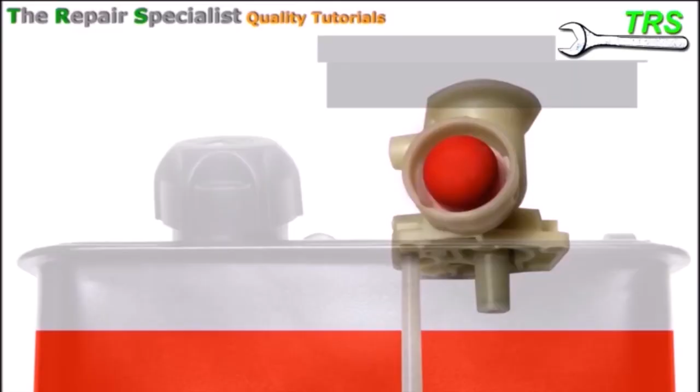What do I mean exactly by flooding? Well, it's an excess amount of fuel getting into the engine, and this generally prevents the engine from starting or running.

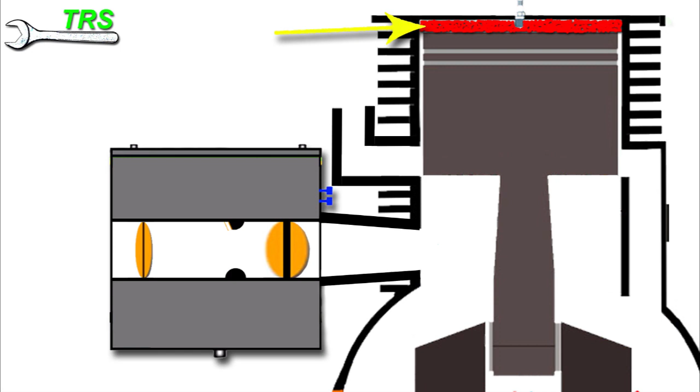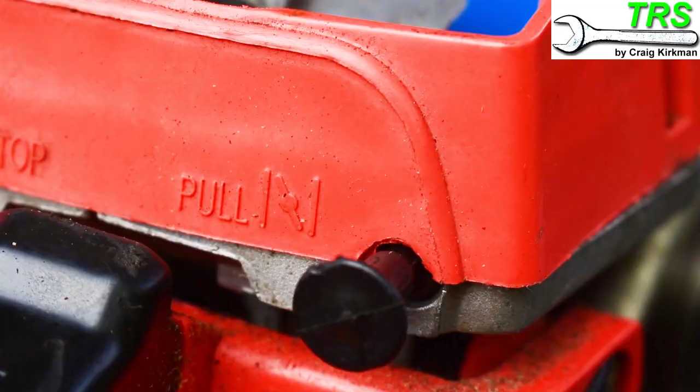There can be many reasons for flooding, but one of the most common is when the choke is left in the on position too long. Sometimes this happens unknowingly due to a mechanical disconnect between the choke lever and the actual choke butterfly or choke plate, so no matter what position the lever is in, the choke stays on.

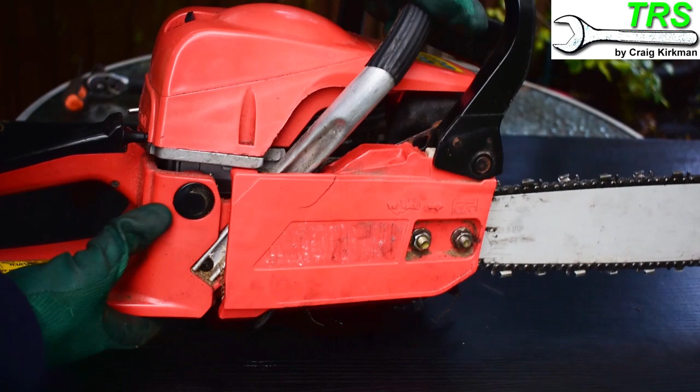Or sometimes the operator has unwittingly left it on too long, such as when the chainsaw is already warm after running for a while and being turned off. A few minutes later, when trying to start it again, the operator puts the choke on, but this only floods the engine because it's already warm and doesn't need the excess fuel.

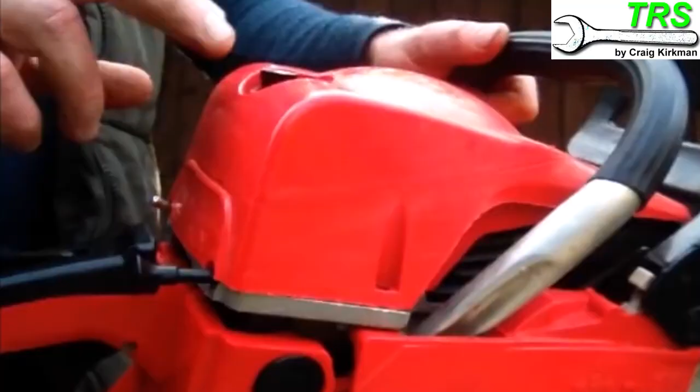Another cause of flooding is when the operator mistakenly leaves the on-off switch in the off position and tries to start the machine, pulling the starter cord repeatedly until too much fuel goes into the engine. Of course it would never start because it's in the off position, and it just fills the engine full of fuel.

One less common reason for flooding is a problem inside the carburetor where it's not regulating the fuel properly. As I've said, these are just a few of the most common causes I've come across.

To begin with, we'd only suspect the engine's flooded, and assuming that it has, there are two main ways we can deal with it: one with the use of tools, and one without.

We'll take a look at each of these, and to save time getting tools out initially, we'll use the no-tools method first.

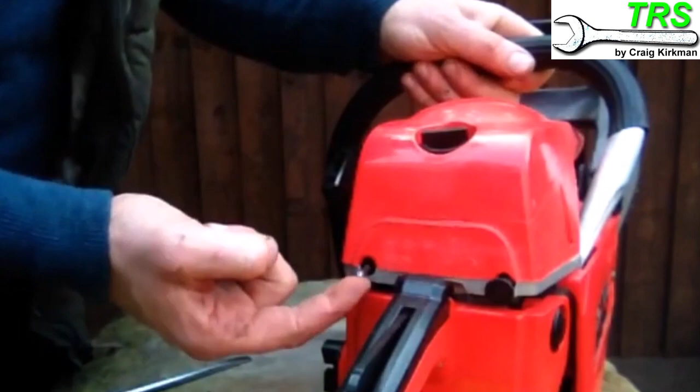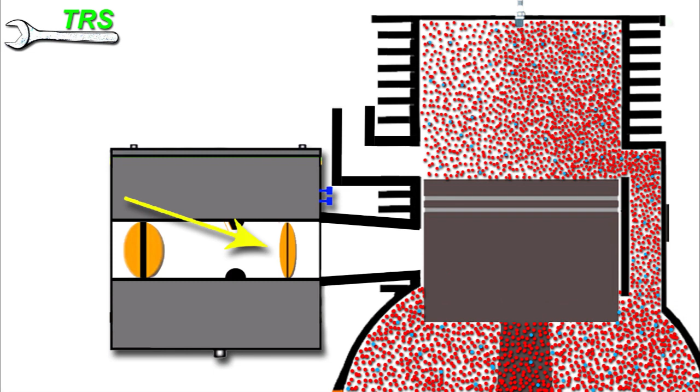This simply means making sure the stop switch is in the on position and the choke is not activated, the chain brake is on, and the throttle trigger is pulled in fully, so the throttle butterfly or throttle plate is fully open, allowing a maximum flow of air through the carburetor and into the engine.

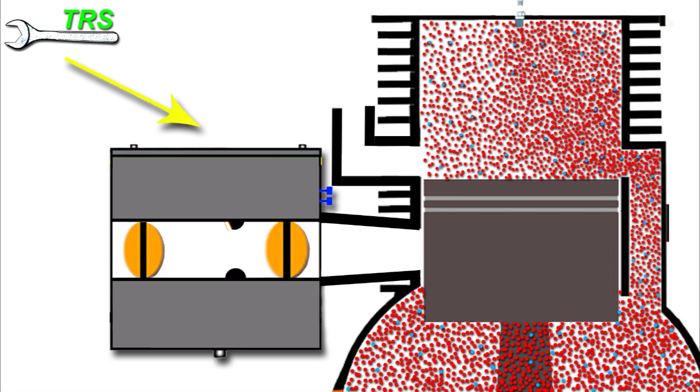Then we can attempt to start the machine. This is going to take quite a few pulls of the cord because we're trying to get fresh air into the engine and flush some of that fuel out, so there's a more favourable ratio of air and fuel mixture in order to start.

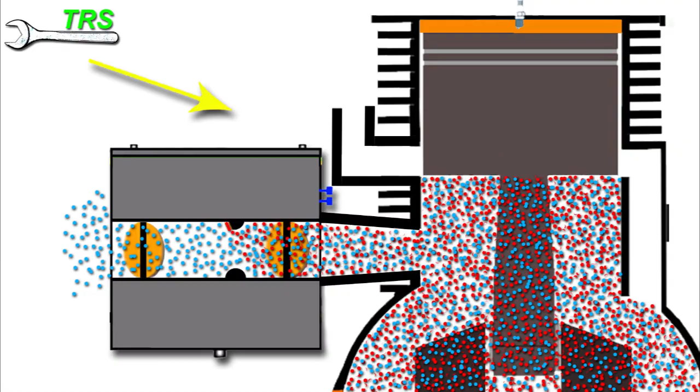As and when it does start, it will initially be very smoky because the engine is burning up excess fuel, but it will only take a minute or two to clear. So if we've tried this method and all is okay, great. But if it hasn't worked, we need to move on to the next method using tools.

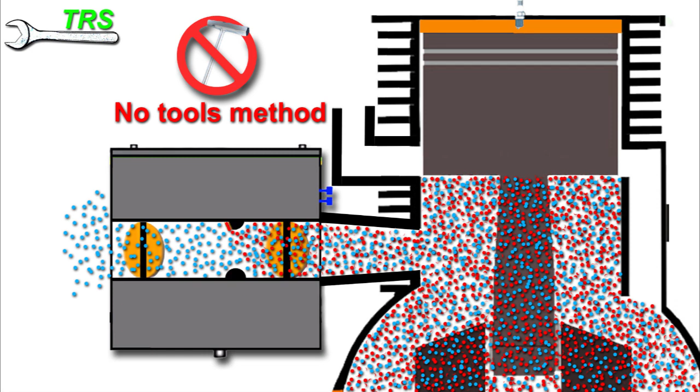When I say tools, all I really mean is a spark plug wrench. So now we're going to expose the spark plug. We'll take the top off here, and for this particular brand of chainsaw we remove the air filter, and then we can remove the spark plug cap.

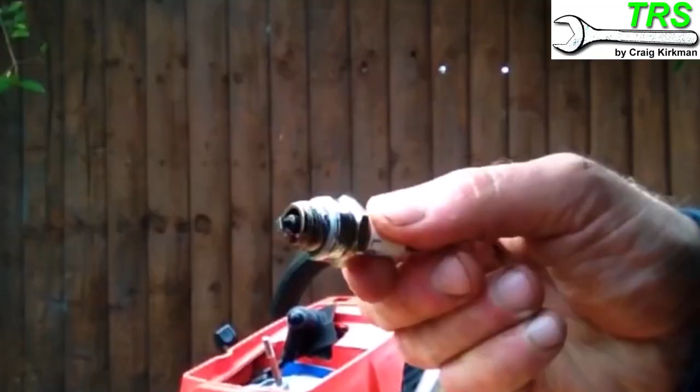We need to remove the spark plug, and once we've taken it out we can take a good look at the end of it. I realise it's quite difficult to see, but the end of this spark plug is quite damp with fuel, which would suggest flooding.

So the objective now is to dry this spark plug, and usually a few good blows like this can dry it. If not, we can use an airline, but that's okay.

Now we need to consider the cylinder. Inside there, obviously there's flooding, a lot of fuel that's unburnt. Another thing I'd check at this point is just inside the inlet, making sure there's no more excess fuel, and tipping it out like this if there is—this isn't too bad.

Also make sure the choke lever is operating the choke butterfly, and for the next part make sure the machine is turned off, so no electricity is generated up to the cap here. We'll want to remove that fuel from the cylinder outwards.

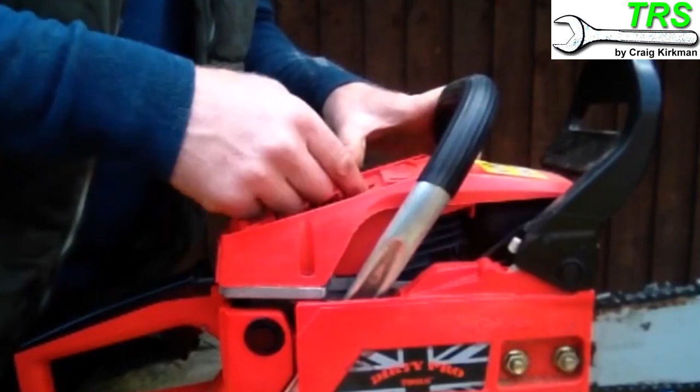The best way to do that is to pull the starter cord, and the fuel inside the cylinder can emit from the spark plug hole. But one thing we do not want to do is breathe in any of this mist as it comes out.

So we've cleaned both the spark plug and the cylinder, so we'll put the spark plug back in, and then build the machine back up.

The one thing we do not need to do when starting the machine now is use the choke, because we've got enough fuel inside the cylinder already, so we just need to turn the machine on. Like before, if possible, make sure the throttle is fully open when you start it, in order to get as much air as possible into the cylinder to balance out all the fuel that's already in there.

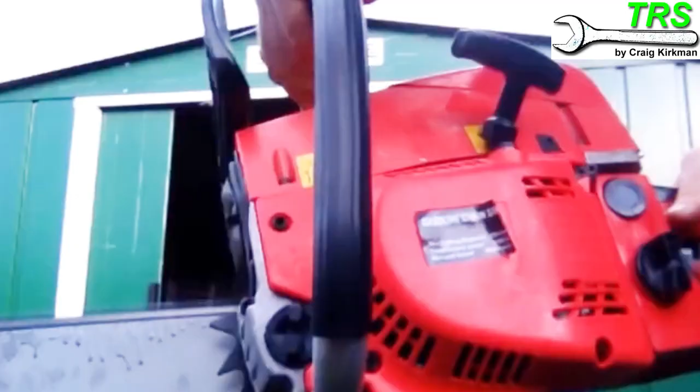I know we've removed some fuel already by cranking the machine earlier when we took the spark plug out, but there's always some in there that needs further removal. Next time we try to start the machine, we should get a different result—that is, of course, if flooding was the only issue and it only required this very basic procedure.